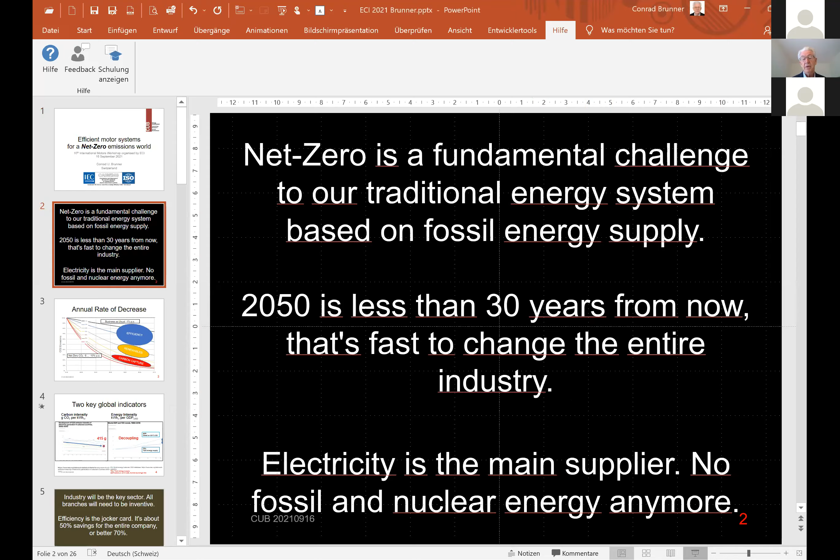So now you have 3 possibilities to come down within the remaining 30 years to net zero. You can go in the usual way we have been discussing the last couple of years, with the business as usual reduction rate of -1% per year through efficiency. You can, of course, also increase efficiency. Then you might come to 3%, 4%, 5% efficiency.

If you want to go much further, then you're certainly invited to use renewables as the key driver for lowering your CO2 emissions. And if you really want to come to something like below 10%, I think you also have to reach out for the third possibility, which is carbon capture at the end use site. That means if you're a company running a big business and emitting a lot of CO2 every year, these are the 3 major means, and the size of the 3 circles indicates maybe their relative importance.

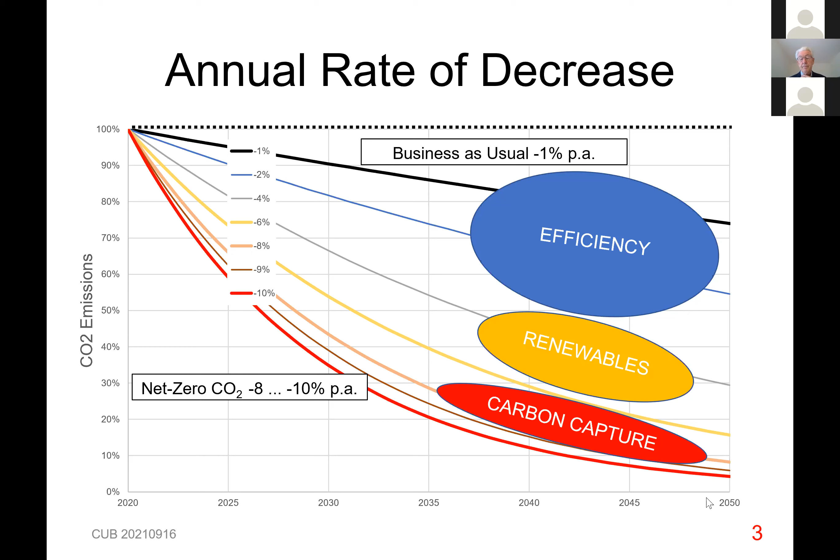Now, there are 2 key global indicators that sort of follow through with what is going to happen. The first is the carbon intensity of the electricity delivered. If the electricity would be 0 carbon, no problem, but that's not the case. Actually, currently, we emit something like 415 grams per kilowatt hour. And when you look at the development since the year 2000, all these countries indicated here, China, India, Germany, the European Union, the USA, and Canada, have sort of followed a slightly inclined downward path to 415. But eventually we want to reach something like 100 or below 100. That means there's a long way to go, and certainly the inclination of the curve is not enough.

The other very important indicator is decoupling. That means that we can have energy use depending on many things, I will come back to that, and at the same time have a GDP that is growing, but the total energy supply is not growing as much. In the last 30 years, you can see that the increase of the total energy supply is not just horizontal, but getting a little bit flatter, and the GDP is increasing. That means we already see an effect in the global economy of decoupling.

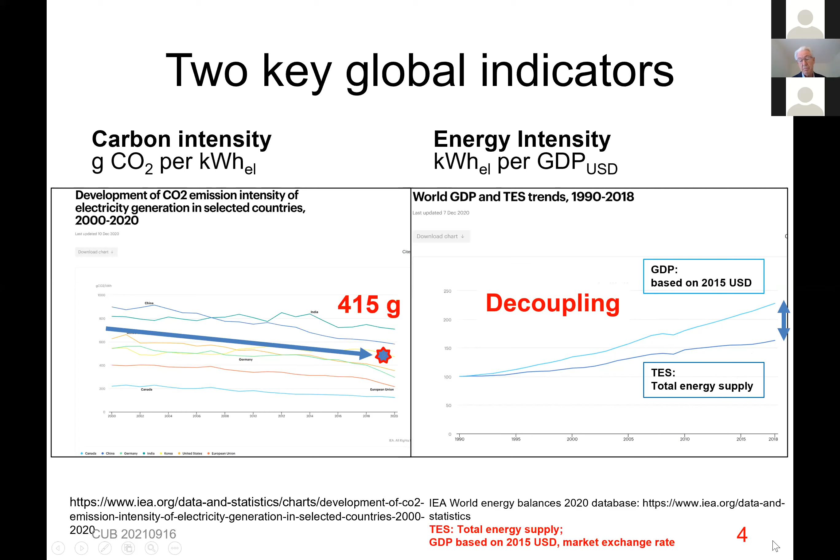Now, industry will be the key sector. All branches of industry will need to be inventive. Efficiency is the joker card. It's about 50% savings for an entire company, or better, 70%. So far, the old goal of savings was something like 10%, or if you were a strong player, maybe 30%, and it was focused on some machine, not the entire factory. This is certainly not good enough for the future.

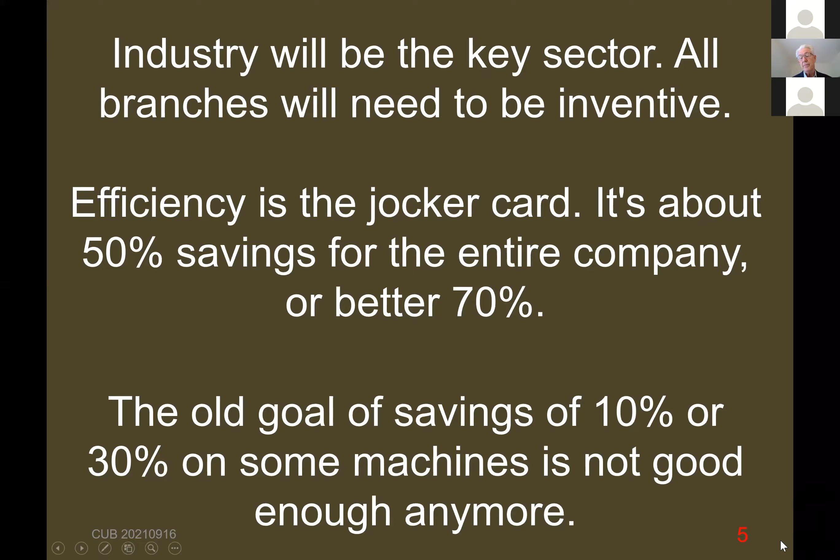Now, I want to explain why this net zero goal is such an important thing for the global electrification between 2020 and 2050. On the left side, I have indicated the demand side of electricity use, and on the right side, the supply side. Now I've highlighted some elements that are increasing the CO2 emission. First and most important is the electrification of many underdeveloped parts of the world, the rural areas. This will increase the demand. Part of the still increasing curve of total energy supply is because of this.

The second is, of course, that we are undergoing a heavy fuel switch. Heat, basically fossil, is now jumping to heat pumps. Mobility is jumping to electric vehicles. This will certainly increase the demand for electricity. And then you also have the transformation in labor. Labor is being replaced by robotic machines.

And on the lower right, on the supply side, certainly the heavy use of batteries, which have heavier losses, will increase the emission of CO2. On the positive side, you have, of course, the whole efficiency complex with integrated machines, with heating, ventilation, air conditioning systems, with appliances, with lighting. This sector is certainly a bigger contributor to the lowering of CO2 emissions.

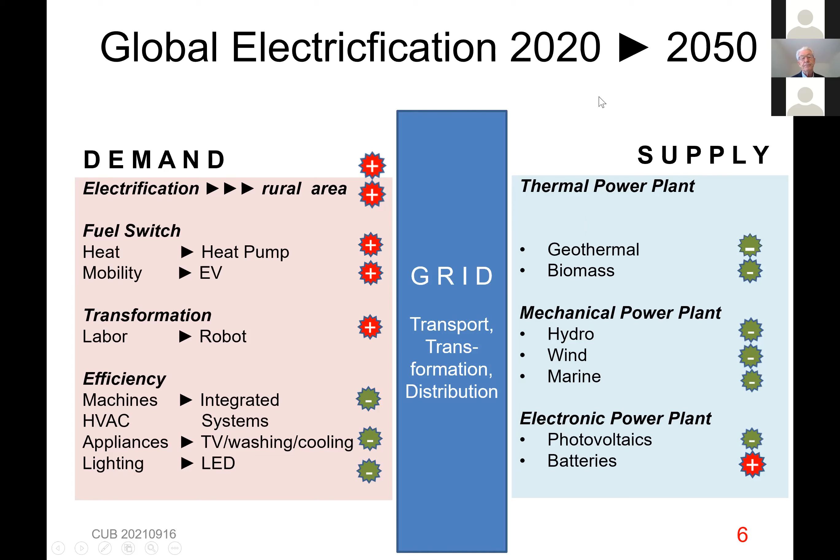Now, I looked at some figures from the International Energy Agency that they presented in the context of the IEA's net zero program. And the first view is on the electricity demand from now to 2050. The interesting thing is this gray dotted curve starting at something over 22 petawatt hours per year increases until 2050 to something like 47 petawatt hours. This means the demand for electricity doubles, and it already includes all the savings.

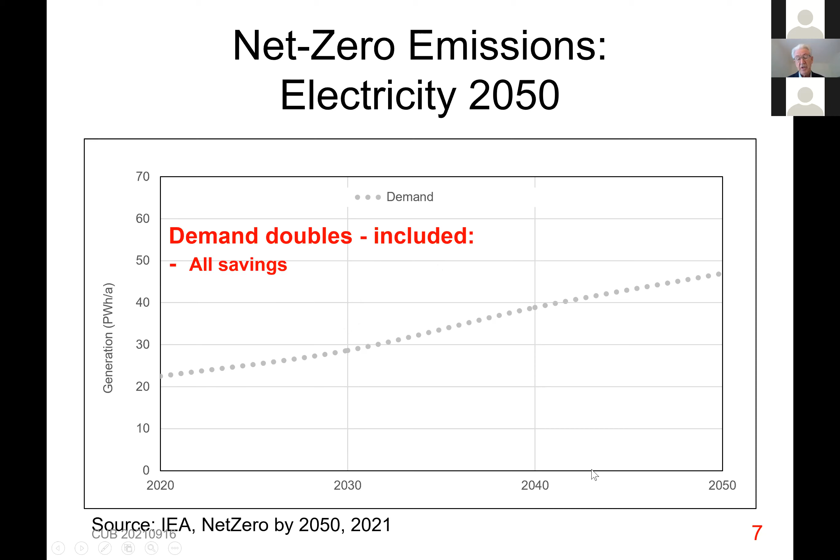That means we have a very severe problem: the red points I just showed you on the last slide will be stronger in the increase than the savings and the reduction that I indicated with the green dots. Now, when you look at the same situation from the electricity supply side, you can see between 2020 and 2050, according to this IEA net zero scenario, a total overturn of the current situation. This is still the dotted gray line for the demand.

You can see almost an explosion, an 8-fold increase of the renewables, all kinds, solar, wind, biomass, all hydro. And you can see the decrease of the current fossil, and you can see the low and still unimportant role of nuclear remaining. That means we'll have a total change of the energy demand and supply system coming over the next 30 years.

Now, what does this mean for industrial motor systems, coming down from the global to the meso level, where you have a big company where industrial products are produced or services are delivered? Then you have to think, what does that mean for us? What is this global goal for net zero meaning for us? I would say there are 5 points. The first is to reduce demand.

Demand in a motor system means pressure and flow, capacity, temperature. Many of those demands are actually not needed, but they're delivered. Many compressed air systems run at pressures that are actually not needed at all. Second, downsize all components. Our research shows that maybe 2/3 of all motor systems are oversized, oversized for a state that never existed and might never exist in the future. Therefore, you can save on material costs when you downsize your systems to the actual need.

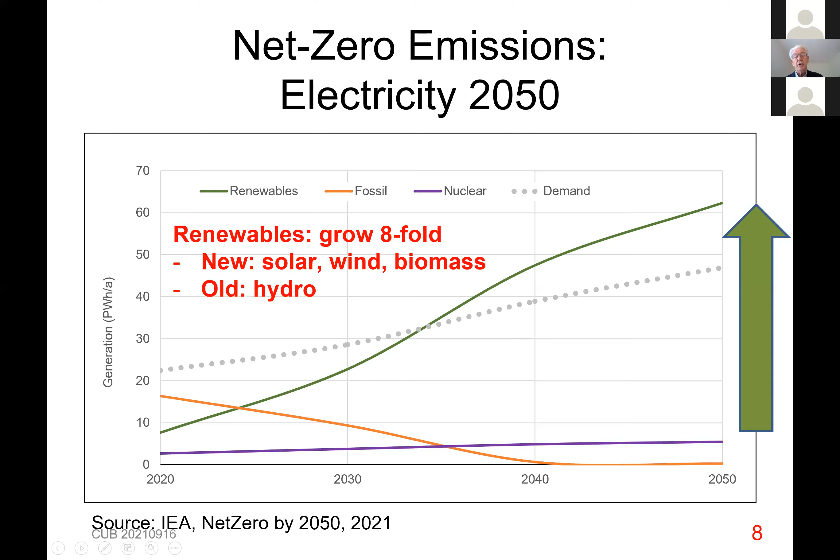I showed you in one of the first slides that we have 3 elements: efficiency, on-site renewables, and carbon capture. I would advise any company of a regular size to at least focus on these 2 elements. I'm a little bit, okay.

Then your company will design its own net zero plan. Today, they usually have a 1 or 2 year production plan, and maybe a 1, 2 or 3 year plan so that they can write nice sustainability reports each year and prove that they're really coming down a little bit. But I think every company of a size, let's say with more than 1,000 people working, will need to have its own net zero plan for 2050.

And of course, during this time, renewables are getting competitive in price, in availability, with grid electricity and with efficiency. That means you really have a lot of chances to do what you need to do. Now, I want to show you some efficient and inefficient systems.

This car is the #1 gas guzzler I found in the US market today. It's a Range Rover, and it uses something like 130 kilowatt hours per 100 kilometers. And it is, of course, fossil fuel driven. Of course, you can also drive 5 people with the same kind of comfort, but with a little smaller car. And it can be electric driven, and it only uses 11.7 kilowatt hours per 100 kilometers. This is the most efficient electric car I found on the market.

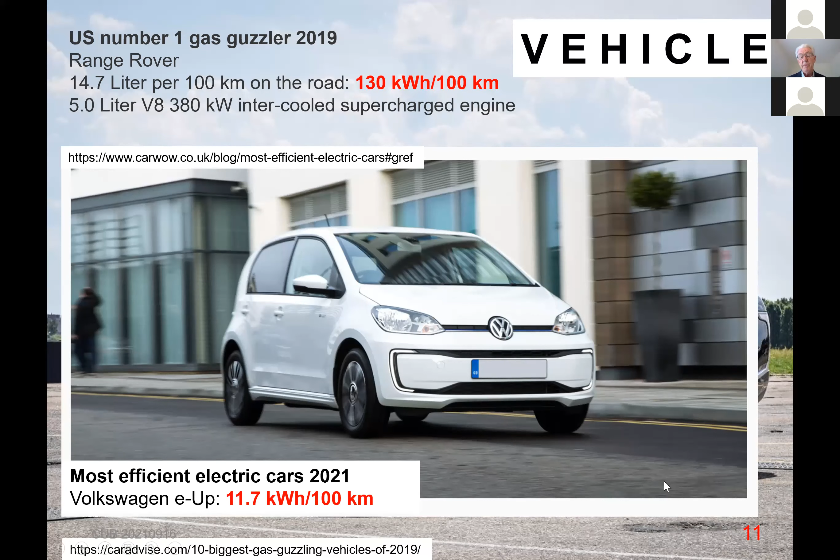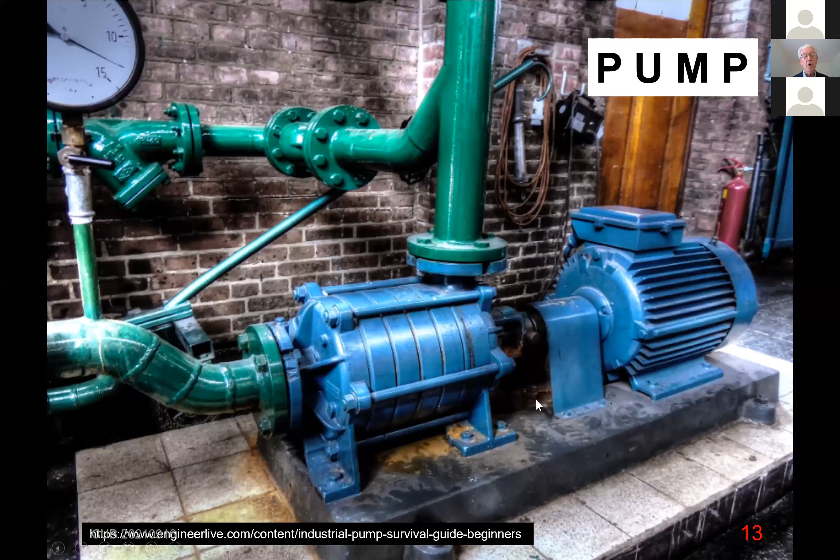I have even, I would say, almost a historic system, but we found similar installations in Europe, in China, in many places that look like you found them in a museum, but this pump is still under operation today. Same thing is true for air compressors.

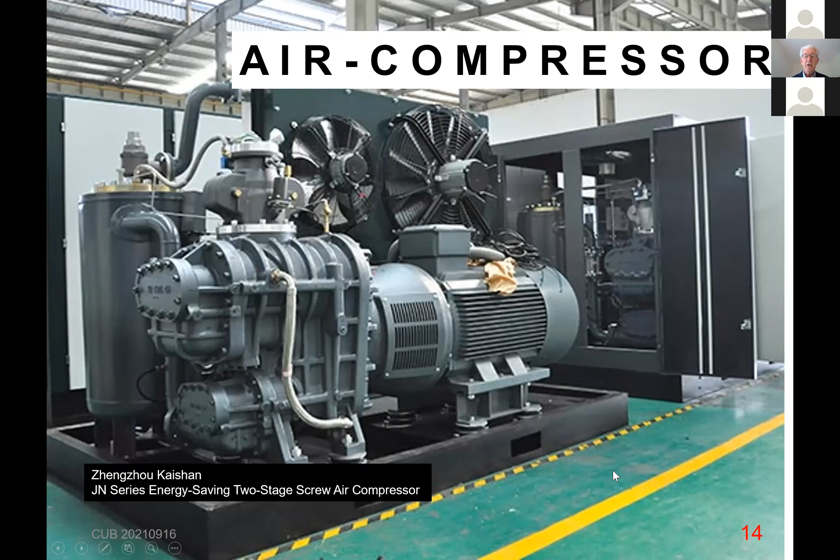Here is a more modern system, which has already integrated cooling and heat use, but also here, on the path to using the most efficient motors, to use load control for the motors, to use the most efficient available compressor types, and then to use only the pressure for the air you need, and the pressure you need if you have a cooling compressor, we are far away from having an optimum situation in the whole world.

And if you would replace this system, all the motors, and I'm sure all the pumps, you would make them smaller, you would make the pump system more efficient, and you would drive them together in a variable speed control system. You would save plenty of energy. I will show you an example shortly. And this, of course, is the modern example.

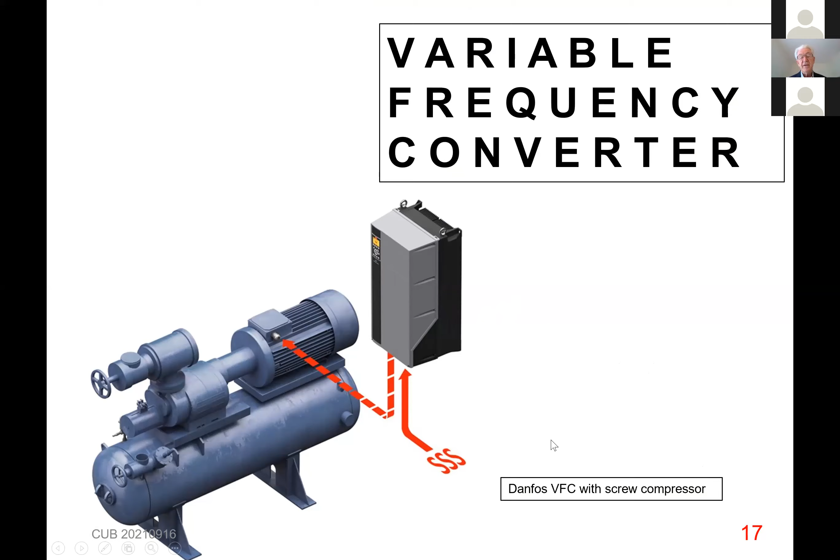Now, I want to show you the number one case. It's a very generic case of what happens when you improve an existing system. At the outset, you have any 10 kilowatt nominal output machine. Could be a pump, a fan, anything that rotates. It starts with the machine being oversized, operating with fixed speed, has gears and V-belts, and it uses current components like motors and pumps and whatever.

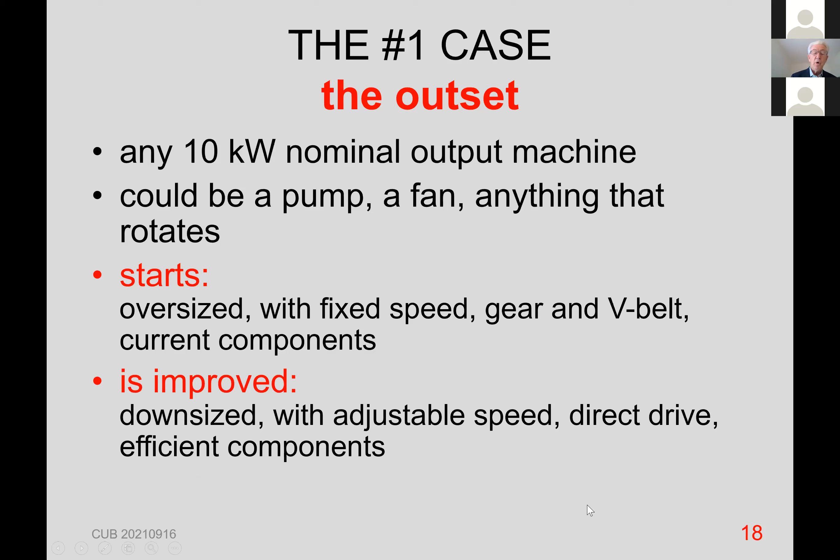It can be improved: downsized, first thing, adjustable speed drive, direct drive, avoiding gears and belts, and using efficient components like state-of-the-art motors, variable frequency drives, and pumps and fans. Now, this is a sequence of efficiencies. This is the efficiency of the variable frequency converter, the motor, the gear, the belt, the pump, and then that's the consolidated efficiency. I've always indicated the full load efficiency and the part load efficiency.

In the case of the VFC, old type, you have 92% in full load and maybe 75% in partial load, because the machine runs frequently between 20 and 30% of the necessary load. That means torque and speed are reduced. In the motor, same thing, 90% if it runs full speed, 80% if it's running on average in lower speed. Gear is something like 95%, belt also 95%, and their respective partial efficiency are a little bit lower.

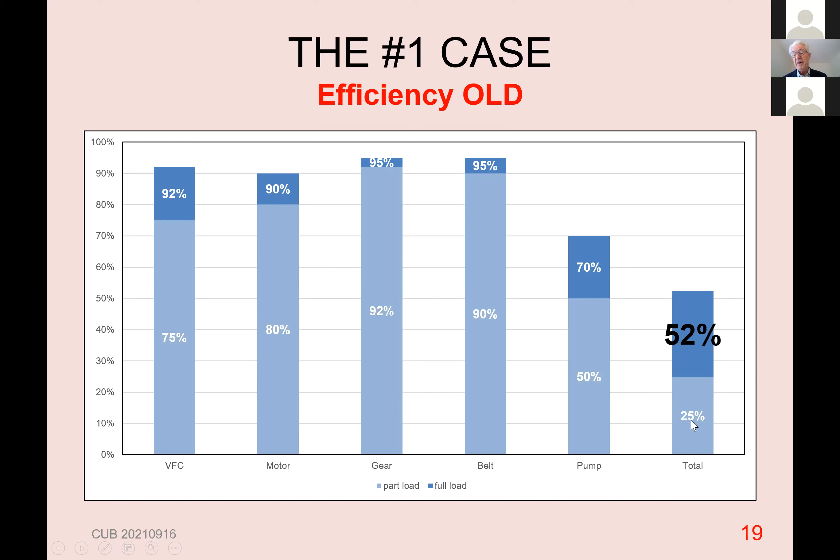And the big, if you want, increase can be made if you have a good pump. This is an old pump, 70% efficiency at nominal, but you're using it mostly in the 50% in the part load. Now, if you multiply the VFC, the motor, the gear, the belt, and the pump efficiency, you reach 52% on the full load and 25% efficiency on the part load. Now you start to work.

You put in a smaller motor and VFC, you go to the highest available VFC quality. You carefully calculate when it is on the full load, when it's on the part load. You do the same thing with the motor. You avoid using a gear and the belt, therefore here is 100%, no losses. And you go to a pump which has 80%. You might change the type of pump, but you come to 80% and 70% in part load because it's properly sized and is not used under a situation where it cannot use its proper strength.

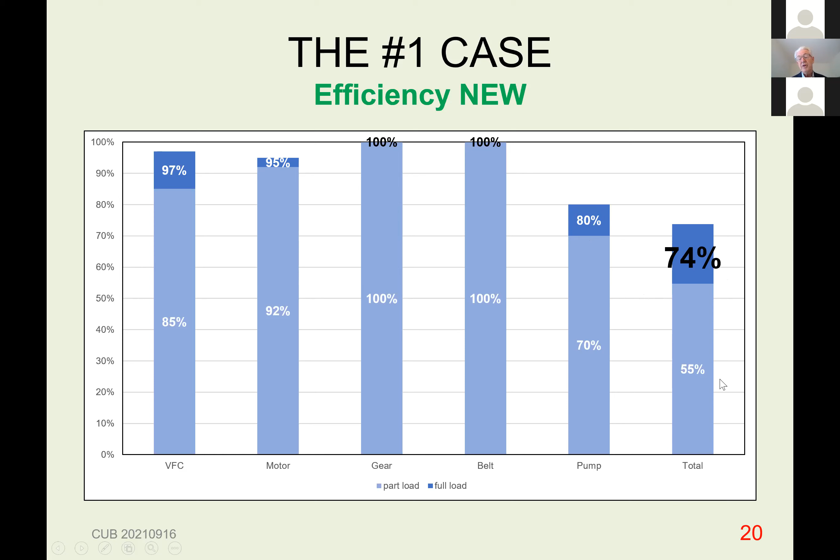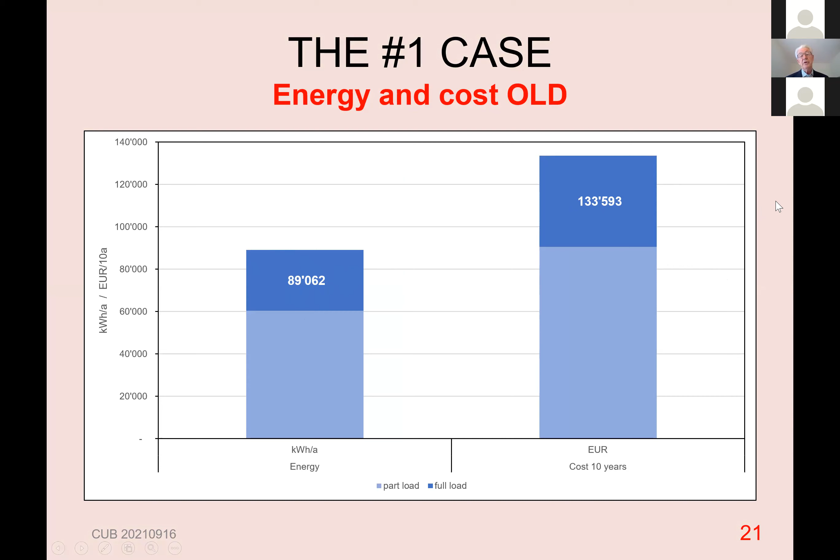And you see the average nominal efficiency comes to 74. Before we had 52, and the average part load efficiency comes to 55. Now, what does it mean? In the existing system, you have been using 89,000 kilowatt hours per year, and the energy cost was 133,000 over a 10-year period with current electricity prices. In the new system, you use only 15,900 kilowatt hours, savings of 73, and you use only 23,800 for the energy cost, and you save 109,000.

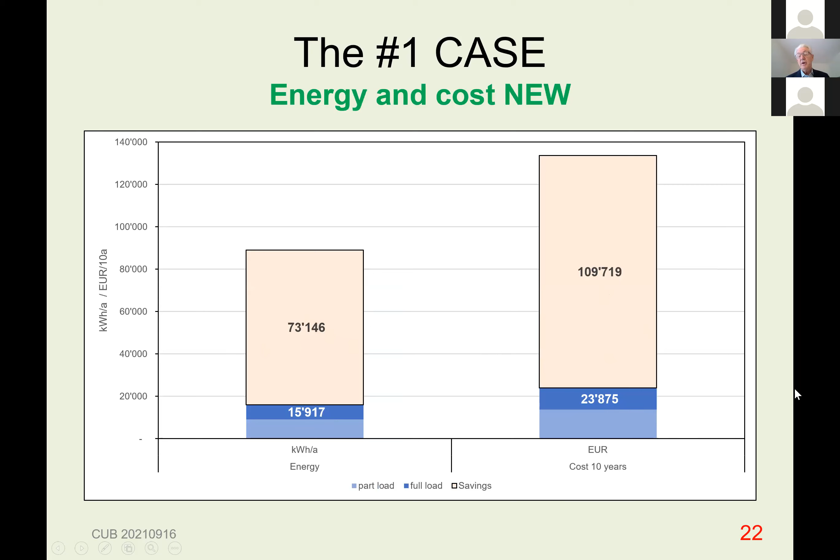Together, what we have learned in this very generic, you can say very abstract example, which is typical for many kinds of machines of this size, 10 kilowatt, can be used for pumps, for fans, for compressors. The savings is even larger than 82%. And the energy cost savings are around 109,000 in 10 years. 10 years is more or less the nominal lifetime, expected lifetime of a 10 kilowatt machine.

What you need to buy for this savings, you need to buy a half size 5 kilowatt IE4 motor, costs you something like €1,000. You have to buy a new 5 kilowatt IE3 VFC. IE3 is the highest available VFC class, not yet standardized, cost you 1,000, same thing as the motor. And you have to buy a new 5 kilowatt, whatever it is, pump or fan, costs you more, maybe 2,000 with all the respective adaptations.

And you have the whole system get installed and adapted, measured before, measured after. That costs you maybe 4,000. Altogether, 1,000, 2,000, 4,000. You have 8,000. And that is only around 1 year payback. And I want to draw a very important conclusion. The conclusion is money is usually not the barrier. Usually the barrier to do that is on other things. And the economy of such an intensive replacement, the renewal of a system with downsizing and using best components, matched components, and direct drive, is usually no problem at all.

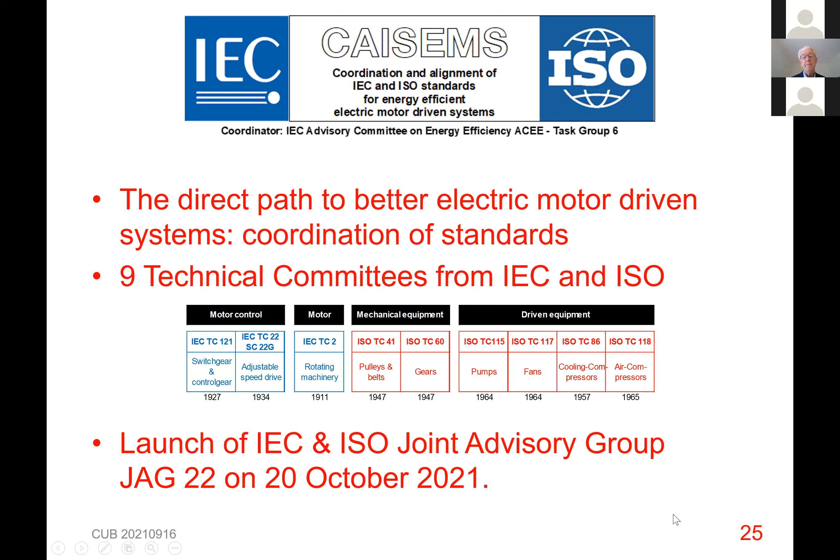That means these 9 technical committees have to start working together, have to start agreeing on joint system standards, on standard for testing, from the input to the output, from the wire to the water, from the wire to the air. And now we are happy to announce that after 2 years of preparatory work, the launch of an IEC and ISO joint advisory group is imminent. The so-called JAG 22 will be launched on 20 October 21. I'm happy to announce that. That has been my ideas about going to net zero.